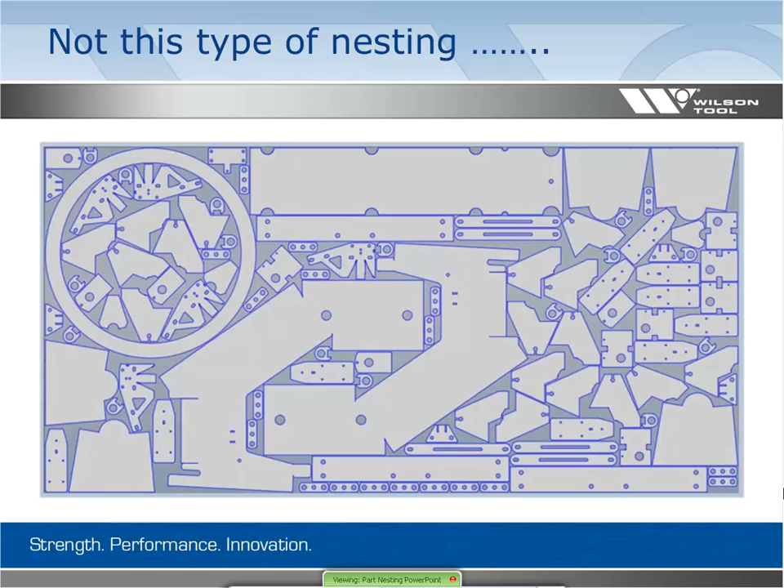Again, finding the right fit, perfecting your nesting processes. I also want to acknowledge Glenn Sheldis' work putting all this material together. Right now, we're not going to talk about nesting as you see it on the screen right now, the very complicated stuff, but rather the same piece individually nested, so it's relatively simple.

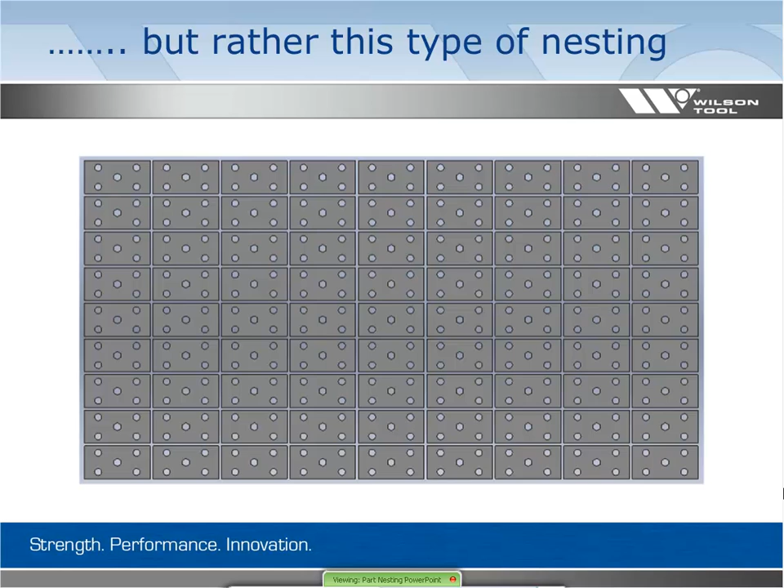So to break it down, we're going to talk about parts falling out, generally due to weak joints, sheet shake, and our solutions are going to be tabbing. We have a variety of options there, and then also when and where to use those tabs. Another nesting issue is pinch points, and those are going to be resolved with some tooling solutions. And then part of nesting is nibbling, so you get that uneven wear or reduced tool life that often results in galling as well.

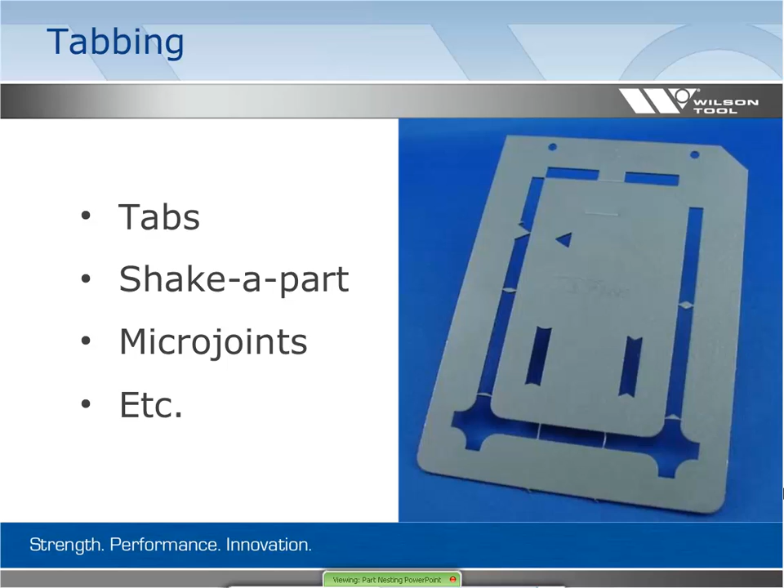Shapes, i.e. piercing tools, then we're going to introduce some lancing or forming tools as part of the solution.

A wire tab, as you see, is very popular, or historically was very popular. It's unstable and does not break cleanly. The tab width is roughly 33% of the material thickness. One would say it's dangerous and should be used as a last resort.

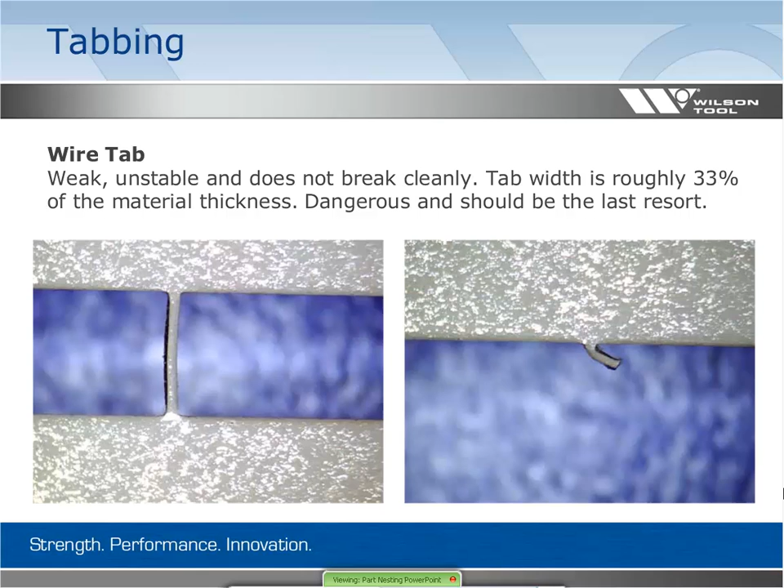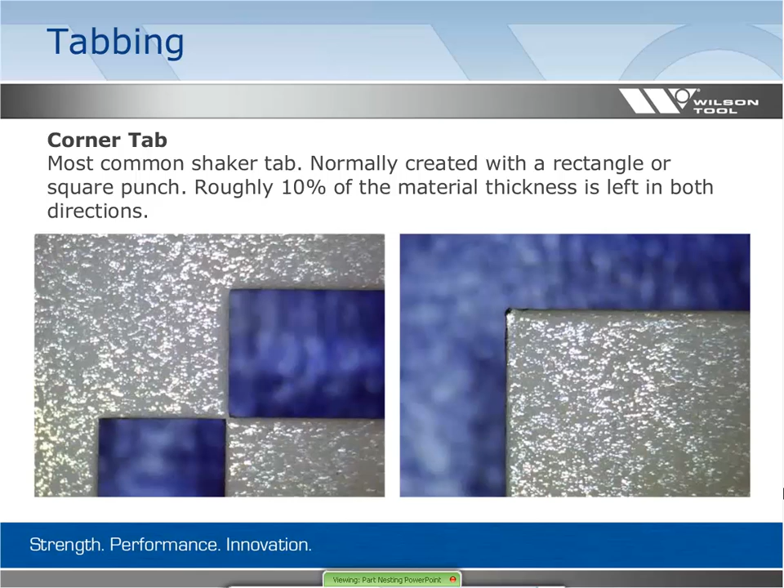Corner tabbing, the most common shaker tab, normally created with a rectangle or square punch. Roughly 10% of the material thickness is left in both directions. On the left side, you see the part still inserted in the sheet, and the right photograph, throughout these, shows how it broke away. That's how we determine that 10%, or how it's defined.

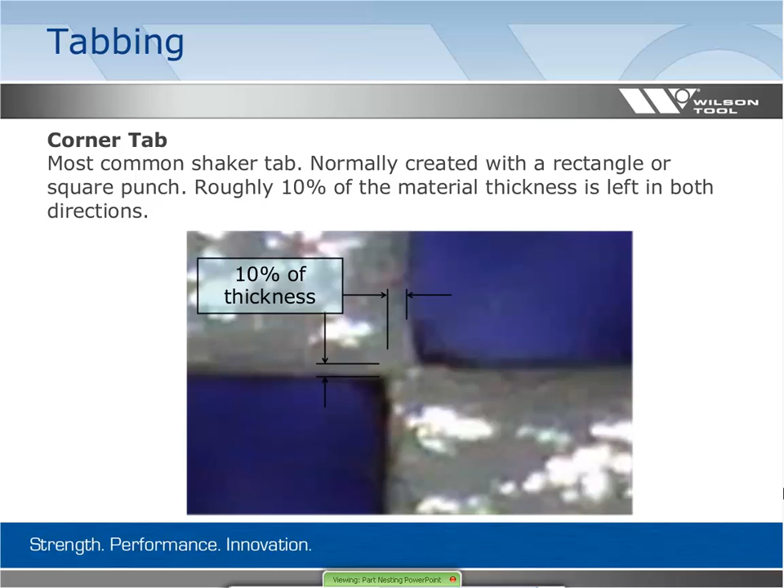Another 2D shape would be an equilateral triangle. It's a standard shaped tool, relatively inexpensive. So we're using a triangular tab that breaks cleanly. The tab width is again roughly 33% of the material thickness. And you can see as it's broken away, there's that little pip that we've created.

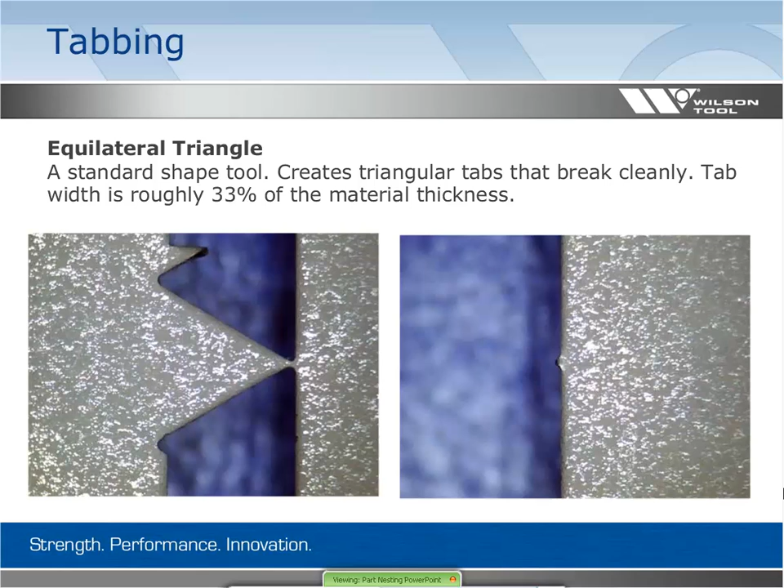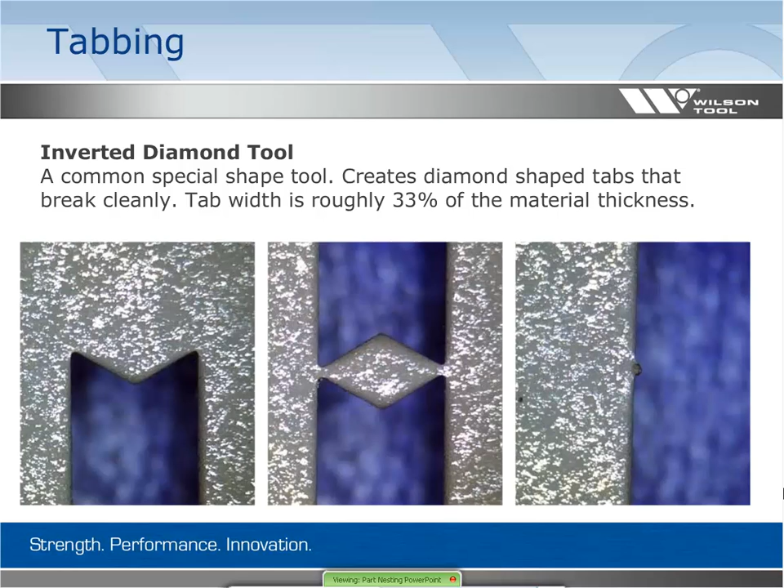A variation of that inverted diamond tool with horns. It's a special shape similar to that inverted diamond. It creates a diamond-shaped tab that breaks slightly below the edge. The tab width is again 33% of the material. The big difference, I'll highlight a couple things: an inverted diamond doesn't have to have just a sharp point. As you can see, this one's got a nice curved arc. But the big difference is we've got this little horn, so it's digging deeper into the sheet. So when it breaks away, when you look at that sheet, nothing really sticks outside from the edge.

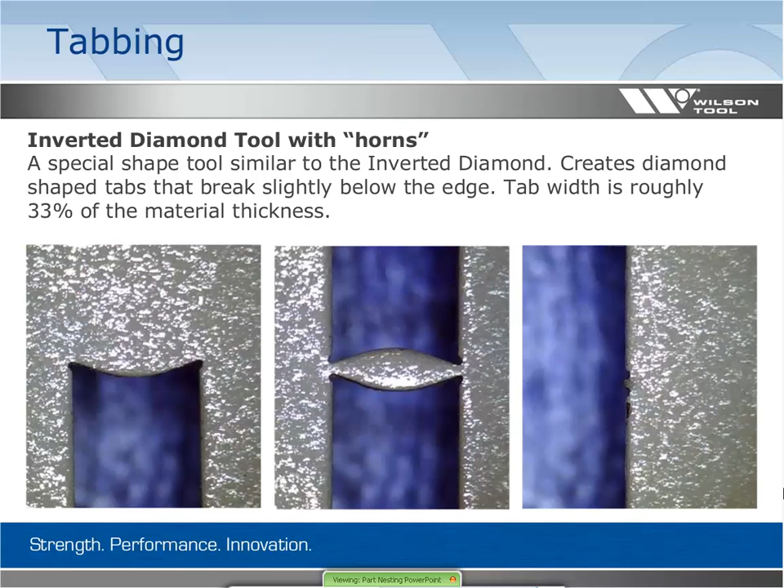This is where we get into forming tools. So rather than just a 2D shape, we're going to put a little form up, form down coin on the edge of a tab, normally used on, say, a chamfer corner. So what I'm trying to do is literally put a little V groove, which can be top, can be bottom, can be both, and that's going to create a weak point where we're going to break it away.

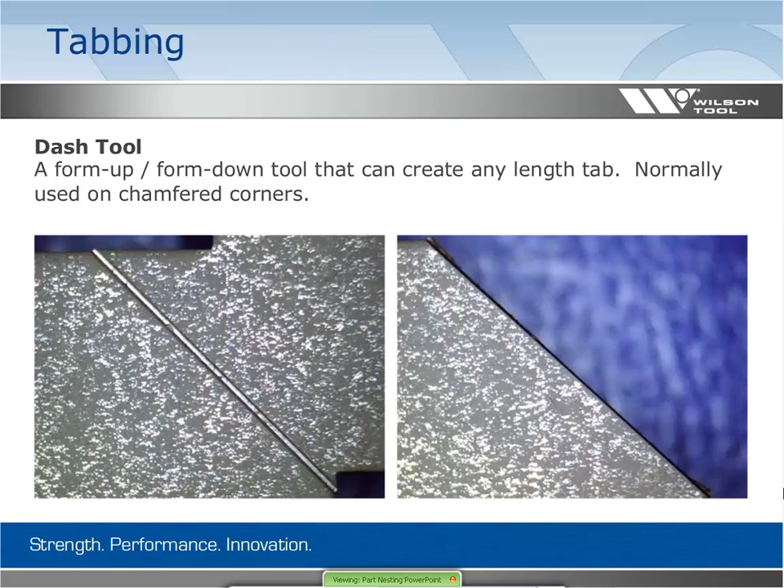Another variation of a forming tool goes by a lot of names. Here we're calling it a half shear tool. It might just be a single-sided lance. I'll show you a couple different ways of doing this, but the forming tool...

Okay, so you can turn that on. Rumor has it we had some audio issues, so I'm moving my location. Sorry about that issue. Actually, I'm going to make sure I clear that by hanging up. Okay, that's gone.

So on these lance and forms and in the coining tools, the big thing that we're really chasing is creating a much longer area of connectivity on our part. That gives us a lot of stability.

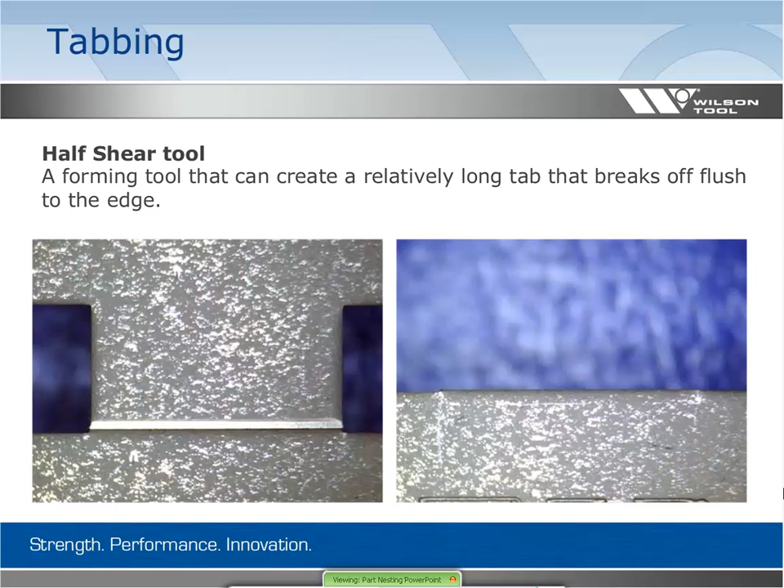Now, with these lance and forms or chisel points, it changes the visual a little bit. So you can see I kind of have two little points of where it broke away, as opposed to just one. But it's a smaller indentation, if you will, so it's generally a cleaner look.

On that single-sided lance, here's a profile where you can actually see how the material is moved from being at the sheet level. It's lanced down or lanced up depending on your direction. You can also see how the opening changed. You got those little pips there.

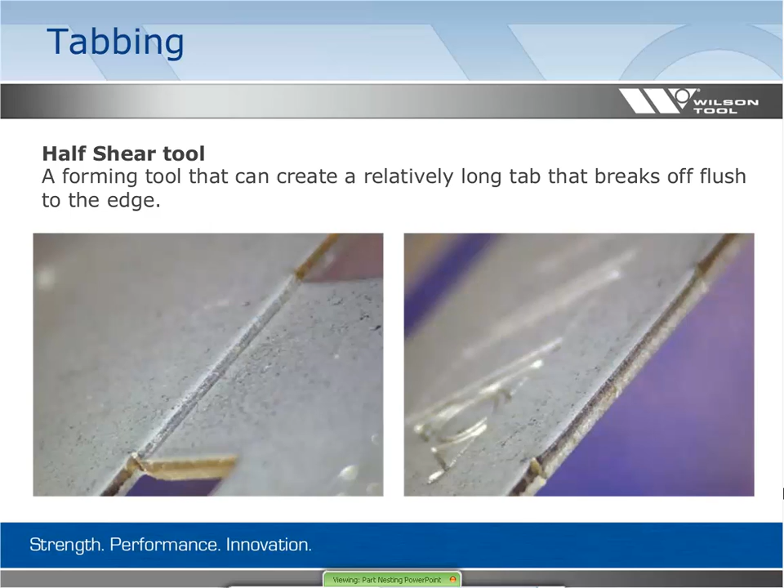This is a sample that Wilson Tool makes and shows with customers, so you can see the difference with this new lance and form design, because it's becoming more and more popular. As you can see, the tab is kind of then gang bent in a press brake.

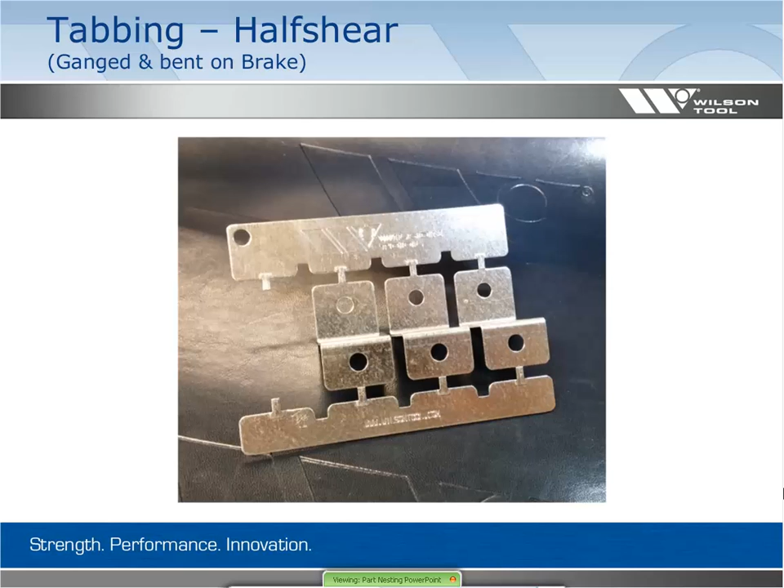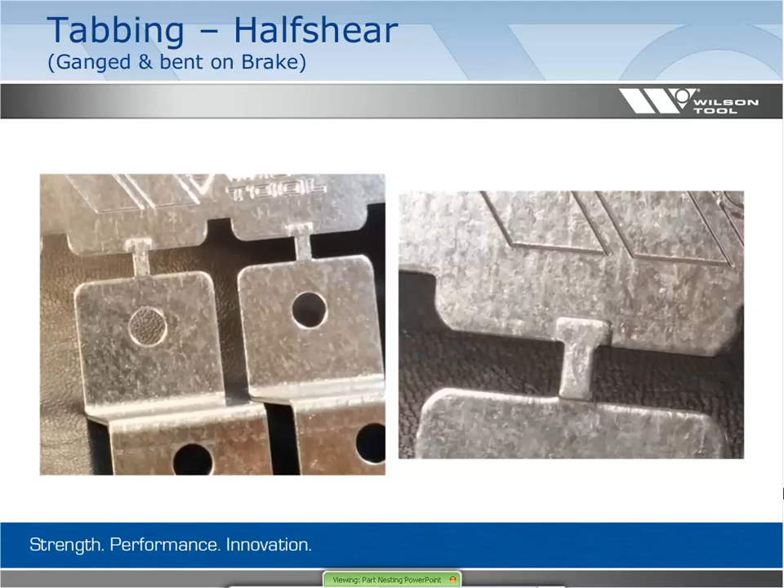Give you a little bit more close up. So in this case, if you imagine, this tool would have been a true four-sided cutting half shear that was run, and then afterwards brought the cutting tool up, trimmed it up into that shape. So it's very stable, very useful, and it allows you to do more and more with your fabrication methods.

So from a programming method, if you didn't have those lance and forms, you can still use your current tools, your current processes. If you tweak that program, we're going to not make that part as small immediately during the process. So I'm going to advance my slide, something popped.

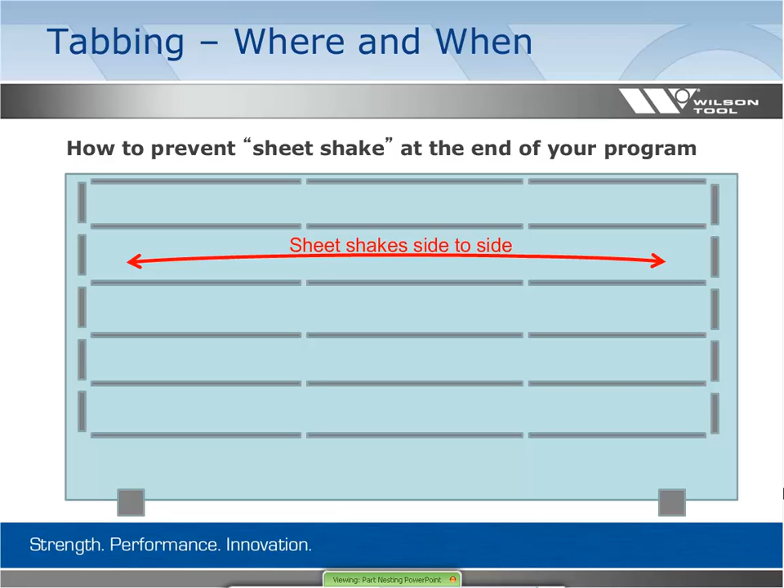So in this slide you can see how we have more web. We left web in a certain area, so as the machine is running, shifting back and forth, it's much more stable. After we get most of the sheet punched out, we're going to come back and then remove more material. At this point, we're going to play a video of this type of operation in process, and you'll see how stable the sheet is while we're punching it.

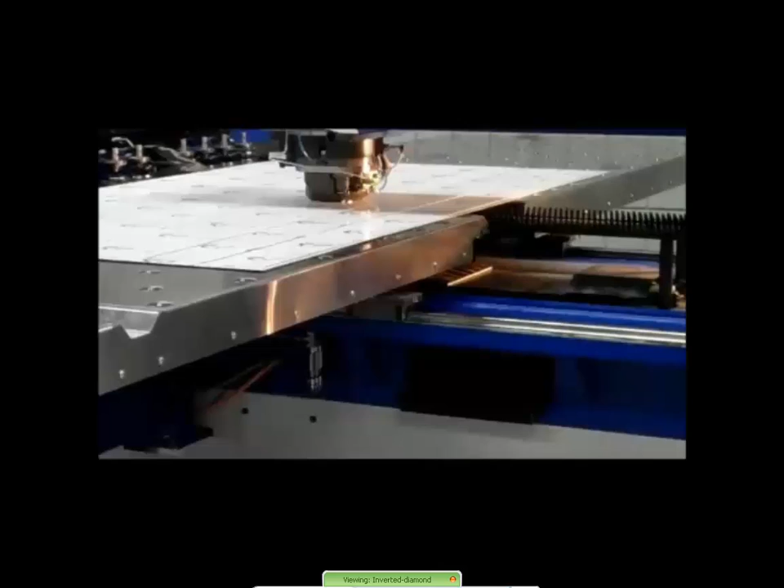Hopefully it went full screen. I tried to make it full screen, or you might want to make it full screen on your own computer.

You'll see a much larger web as it's moving left and right. Nothing falling apart. This part was utilizing corner tabs and then those other tabs that are currently wide, and we're going to narrow them up with this in and out nibbling mode.

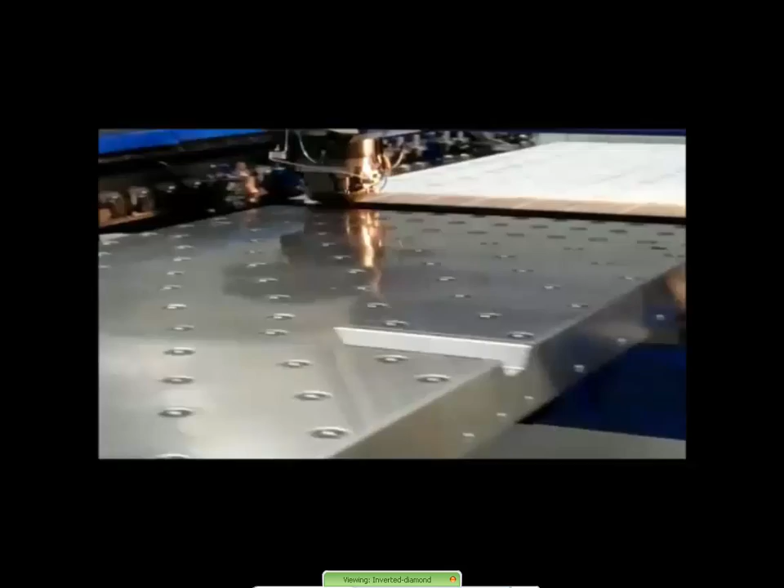Okay, just going to clear my notes here.

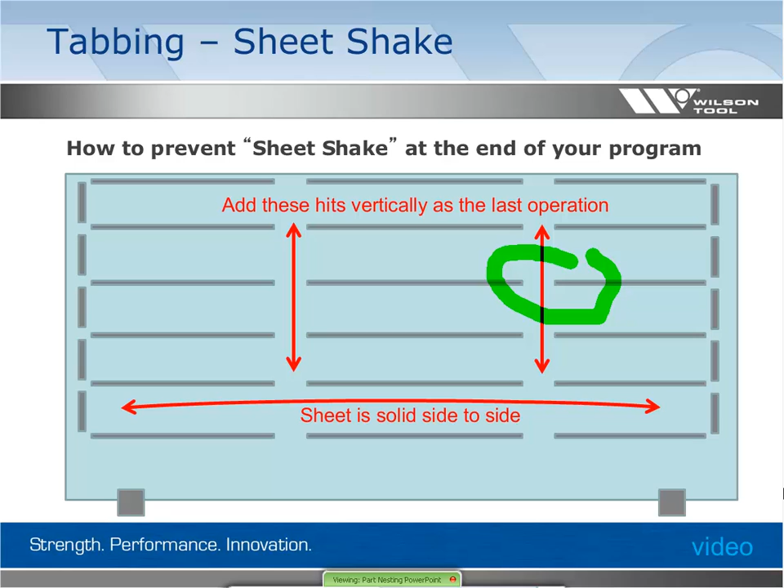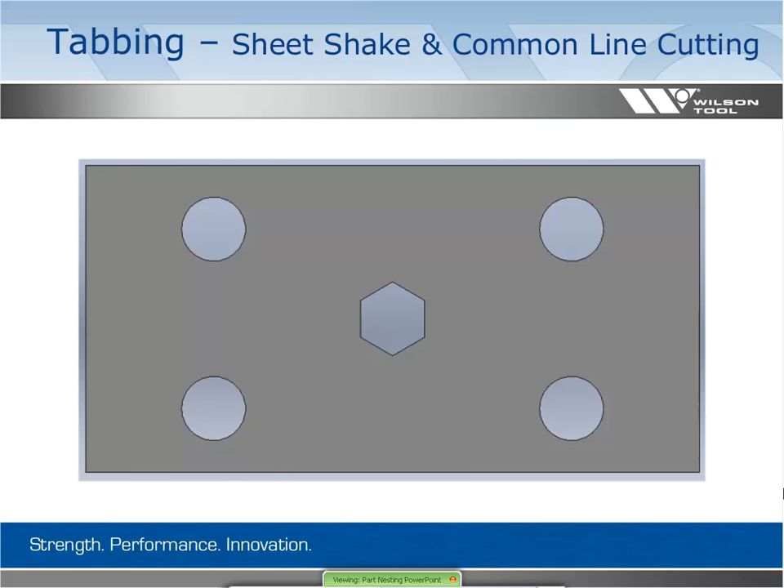Another method of avoiding sheet shake is to nest the parts a bit differently. So if this is our part, and we were going to put it in the nest, here's your inevitable or more common practice. Inevitably, it's going to start shaking apart. What we do is we create mini nests, if you will, so you have those nice, thick webs adding stability to the sheet. So we got 9 little islands there, much more stable to go with.

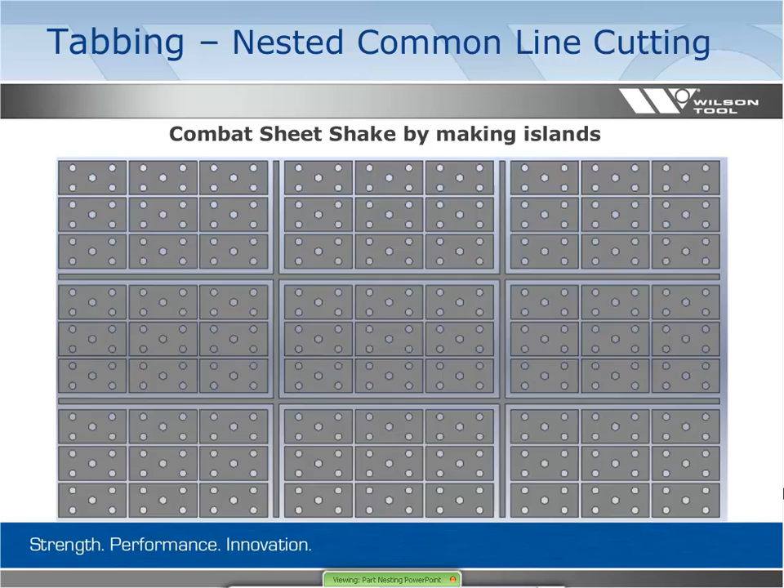So our summary of tabs that we've covered would be the wire tabs. Some would say dangerous and should be outlawed. Many people have cut themselves on them. Corner tabs, for those, your part has to have a sharp corner to use those. Good sheet stability depending on the tab location.

The diamond tabs, they may break at the wrong side, poor sheet stability. The triangle tabs, that requires an auto index station. I probably should have noted that earlier. Better stability than the diamond tabs.

The dash tool has a different edge look and feel. Some might like it, some might not. It's often used on the chamfered corners of a part. The half shear tab: the sheet is formed, which can cause problem issues or programming issues, but it has good stability and can cure sheet shake as a problem.

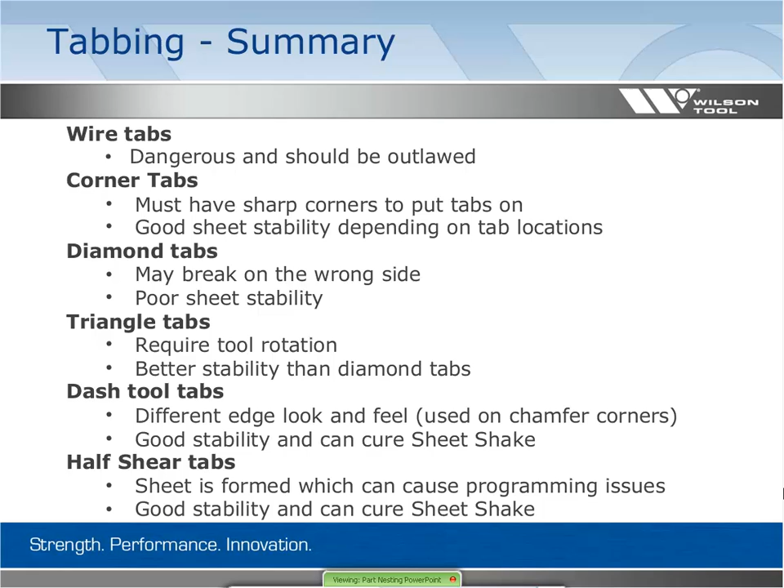I said I'd go back to this Wilson sample. The point of the sample is, when we're doing this live, we have the half shear tab where the arrow is, that's where it's being effective, but inside the sheet you'll just see how it would normally hit when it wasn't used in a tabbing situation. Then your triangle, inside you see it's just a triangle tool, and when you use it next to each other you're creating a tab. So that's what we're trying to show you here.

That internal part can break away, and if you broke it away, on the outside of that sample you could run your finger across it and get the effect of these different tabs.

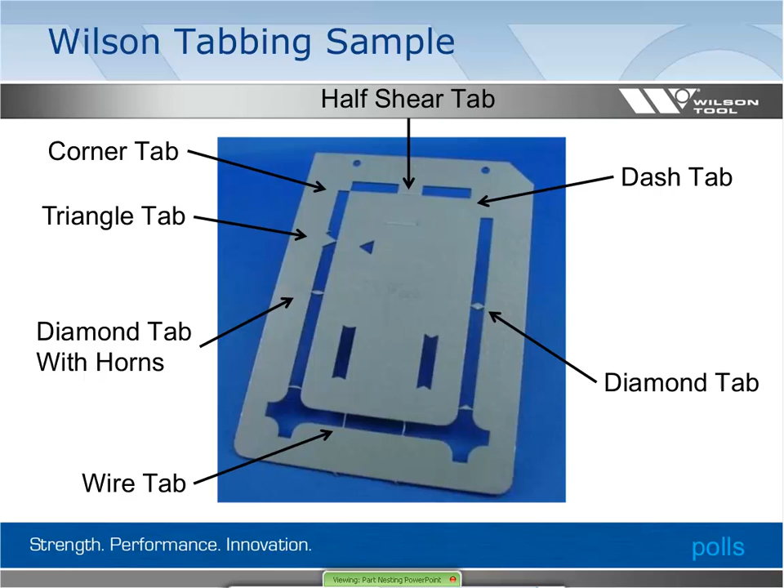The next topic relates to nesting and slitting. We get those pinch points, those ugly bumps along a slit edge.

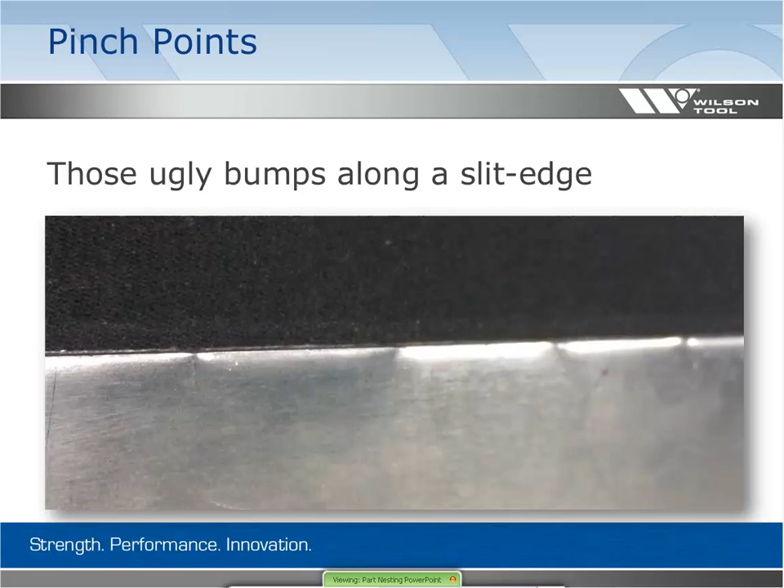Our solutions are twofold. We can do it with 2D shapes, and we can do it with wheel tools. Good ways of avoiding those little pinch points. They're most commonly caused by slitting or nibbling. Hopefully you can see the pinch points. I mean, it is a common complaint for customers, at least to me it is.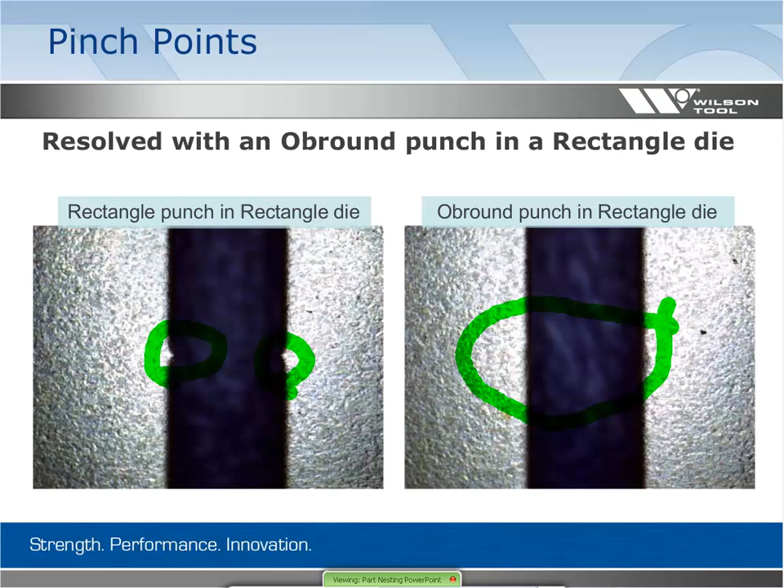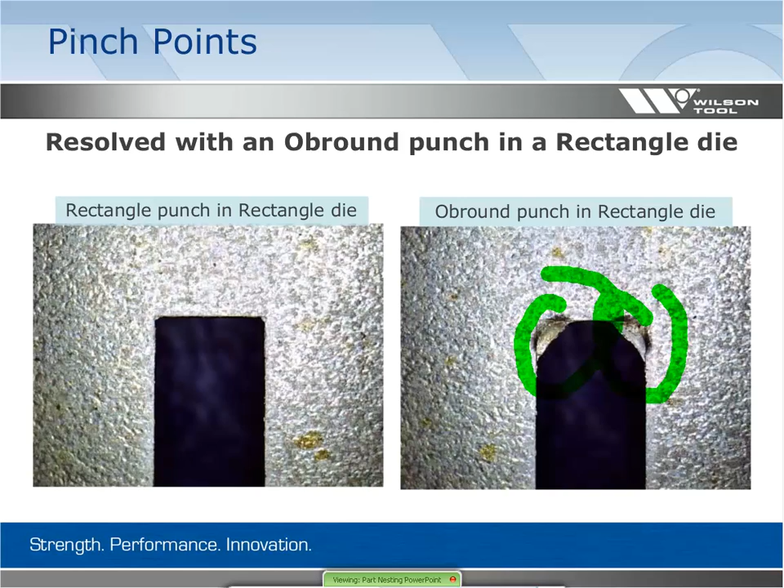Recently I've spoken to some customers who thought they could go with just an obround and that would cure it. It really requires that different shape. I'm going to go back one slide and show you, it requires that effect to get rid of the pinch point. So something to consider.

Another wheel would be a rolling pincher. I failed to give you a slide on what the rolling pincher does, but I'll draw it: the wheel has little peaks, it can be top side, bottom side, or both. But the point is we're pinching, we're coining that material. So before we go slit, we're going to run that wheel up the side that we want clean. Sometimes you're doing common line cutting, so you need to do both sides.

The image on the top shows you if I don't run a rolling pincher, the one on the bottom shows you when I do run the rolling pincher. It's very clear, I've done this for a variety of customers. Some accuse me of just zooming in on the photo to hide the pinch point, but the samples prove themselves. It's also effective to pre-mask burrs on the bottom side, so it's a 2-for-1, getting rid of pinch points on the top side and hiding that burr on the bottom because it never gets to the bottom of the sheet.

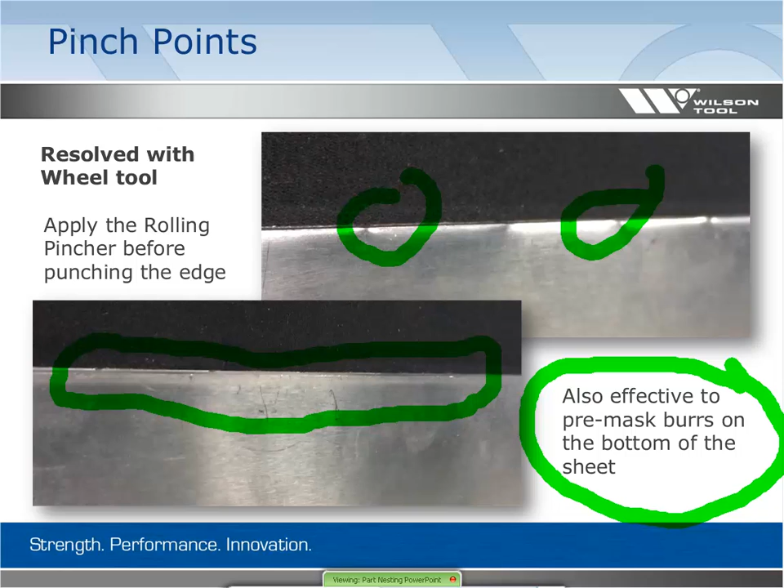Here's just a sample that we like to share with customers, to give them an idea how we're doing the pinch points using a pincher or a dash tool, and we can even gang them up. So here's 9 parts, actually there's 4 subparts in there that we gang together.

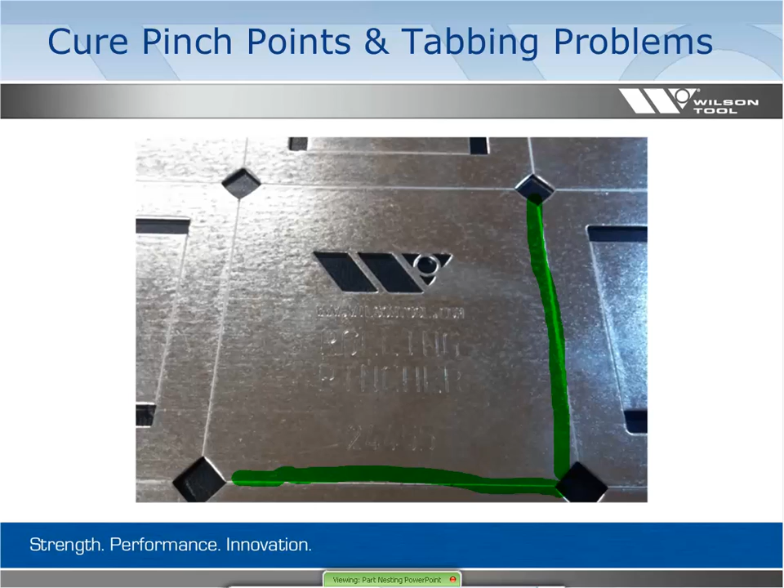They're held together just with that coined edge, that rolling pincher. So a little bit closer setup, we're running those roller pinchers around here, and then as I took the sheet out of the machine, I can snap those apart and they'll break away.

So those cures for the pinch points, we got that obround punch and a rectangle die. But here I'm also noting a long D punch and a rectangle die. The reason for that is because there's those times when you still need to create a corner tab.

So I'm creating that corner tab. I can use an obround and an auto index station, bring my two corners together and still have it tabbed together.

And then the rolling tools, we got the rolling shear, a rolling pincher. Again, it can be just top side to get rid of the pinch point, but if you do a top and a bottom, you can often hide any burring that may or may not occur.

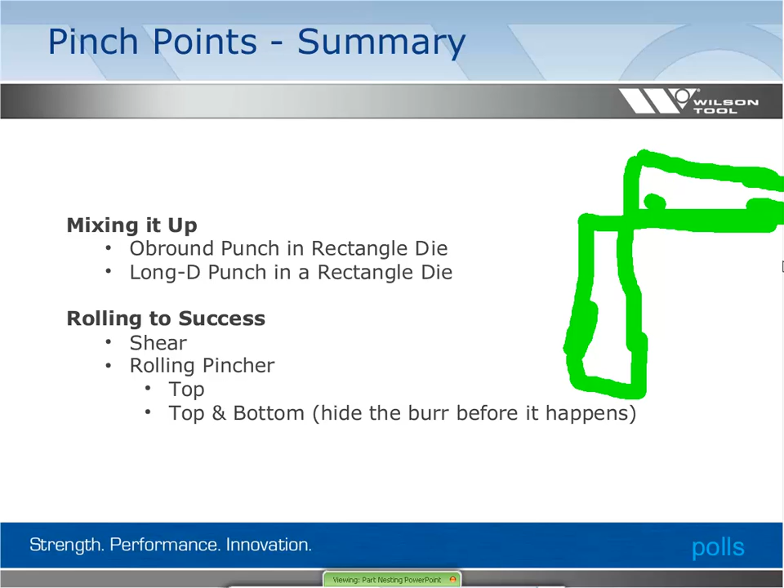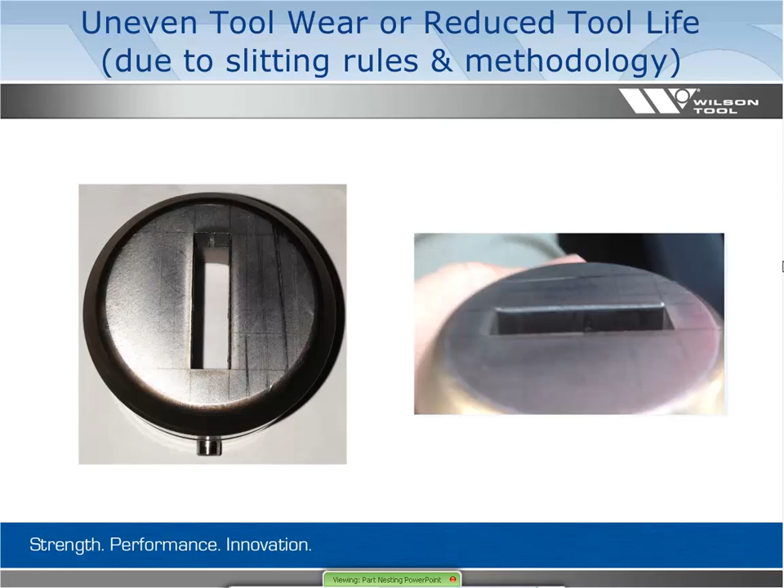Lastly, in the nesting solution, a lot of times you're segregating parts, you are doing a lot of slitting, uneven tool wear, you can get that reduced tool life, rolled over edges, turns into galling, it gets pretty ugly. The die I'm showing you, you can see the marking, an actual die, and you might pick up on the oddity, it looks like the customer's using it slitting in both directions.

That can be a problem. So slitting tools, there is an intended direction, we're going the lengthwise. If you go the other direction, you're hitting often so little material, the slug twists, kicks the punch to the side. Now you got punch and die contact, and you break your tool down very fast.

So here's another poll that we want to have, mainly out of curiosity: do you slit your rectangles in both directions? Yes or no?

Oh, did I skip a poll? Apologize. The poll that's up, if you guys wouldn't mind answering it: which methods of dealing with pinch points do you have? I blew by this one - obround punch and rectangle die, long D. And then the second question is, of the methods you don't use today, which methods for dealing with them would you like to use? So if you guys wouldn't mind answering the poll from a few slides ago, I'd appreciate it.

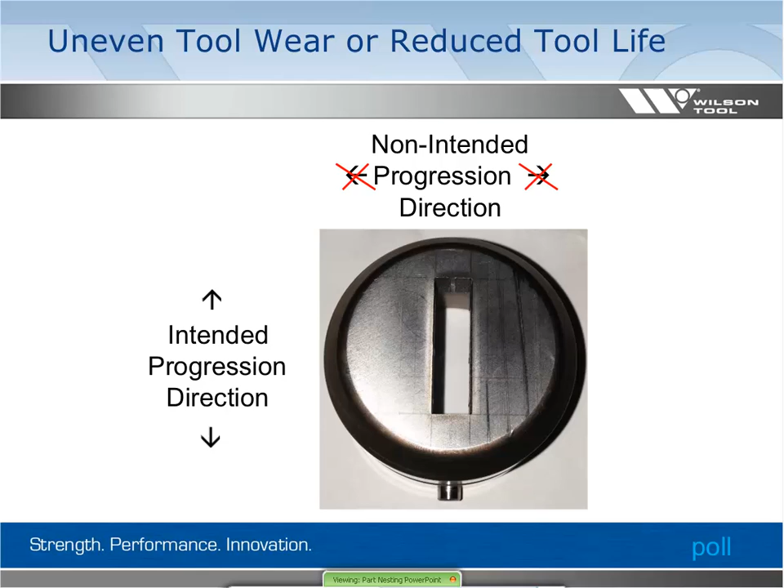Okay, here's our results. Again, there's a fair amount of people who aren't using this method. A surprising number are using the obround punch and a rectangle die, some using a long D, rolling pinchers. And then for those who don't, what you'd like to use in the future, that obround punch and rectangle die really grew up near 60%.

So we'll just move on. Sorry about the delay on that poll.

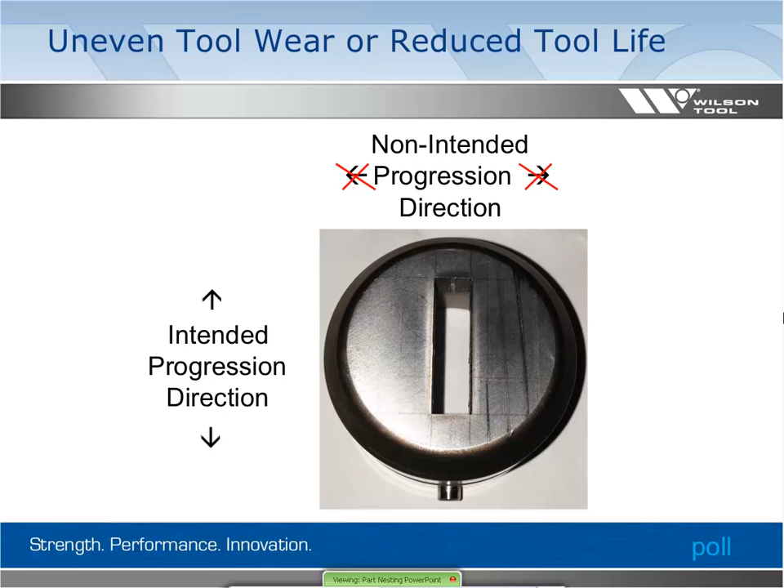So I want to show you here's the intended direction of the slitting tool, and then kind of that recommended overlap. So we'd like to see a minimum amount of corner rad, because often these rectangles have radiuses in the corner, make them stronger. So it's really corner rad with about a half material thickness. Now the maximum, we don't want to take so little material it becomes problematic, again side loading. So we'd like to be about that quarter of the tool length, no more than half.

I know a lot of people do a lot worse conditions, and I'd just like to make a point: you can save yourselves a lot of tool if you pay attention to how you're stepping over on your slitting.

The non-intended progression direction—I'm showing it because I recognize people are doing it. We suggest you don't, but if you still do it, you really should use a large minimum step over, which is pretty much the width of your punch minus that corner radius, minus half material thickness.

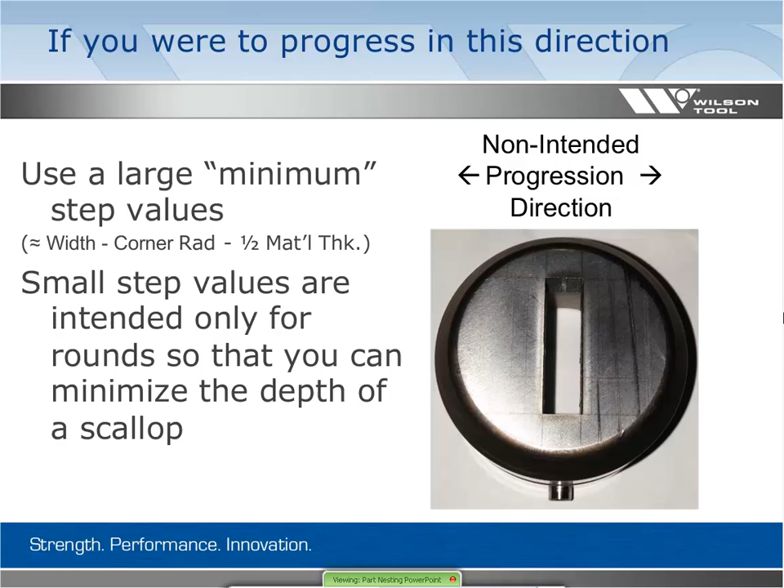We really don't want you to do it, but since you're doing it, I want to give you better suggestions. Small step values in your software have a max and min that are really designed for a round tool doing a contour to minimize scallop depth. That's what I'm showing here—it minimizes that scallop. It's not really appropriate to use that philosophy on a shape tool, really just rounds.

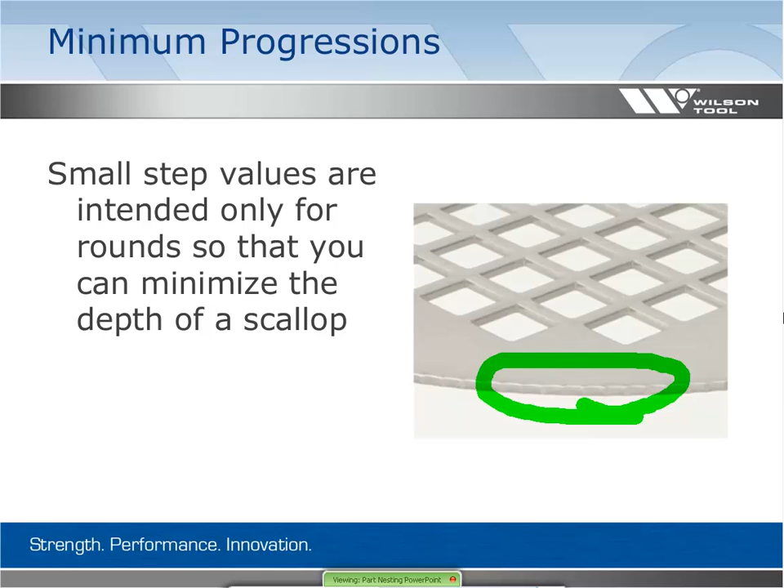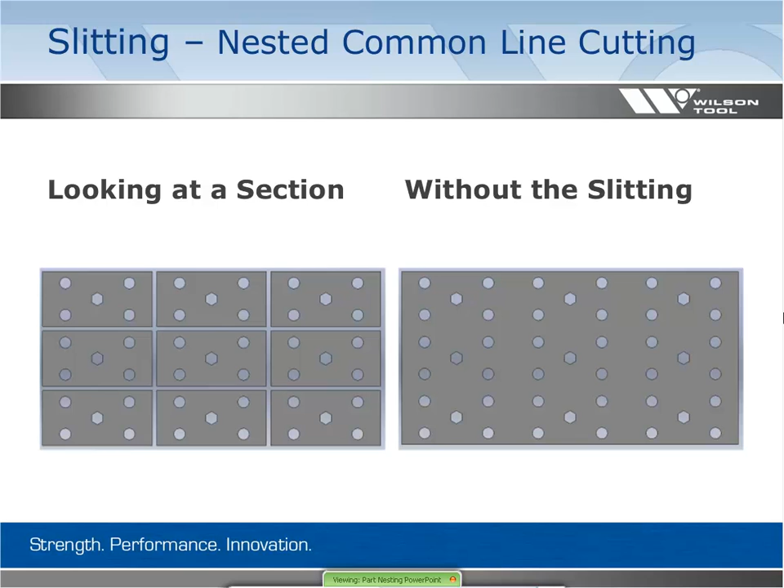Another way of addressing side loading is via the programming. So we're taking away our slits from that larger nest—we took a 3 by 3 as opposed to the 12 by 12 or 16 by 16. We're going to remove the slits, look at that sheet, and see how we can change our programming methodology to enhance our tool life.

On the top side, you've got the traditional slitting, which produces an unbalanced load. As shown, the rectangle in the right direction is the best we could ask for, but it's still cutting 3 sides—you're going to zip right through it.

On the bottom, we're showing an odd-even slitting. This produces a balanced load by leaving those big tabs. For the most part, I've taken full chunks, then come back and knock those out in a backwards pass, cleaning it up, giving an equal load side to side.

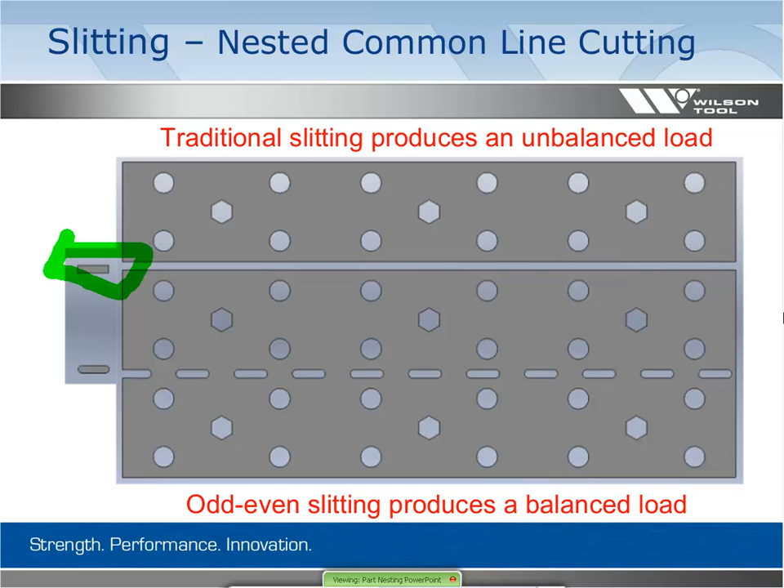Again, that traditional method is going to give you pinch points. On the bottom, I did the obround punch with a rectangle die, which will eliminate some pinch points.

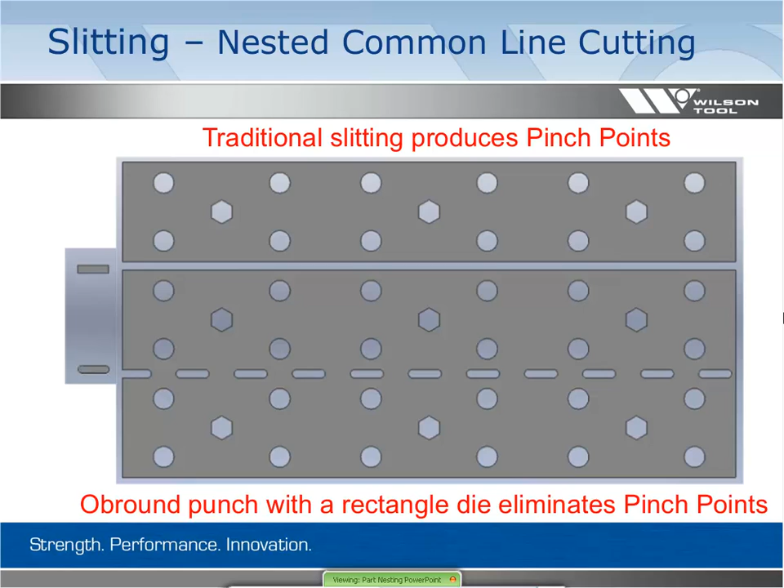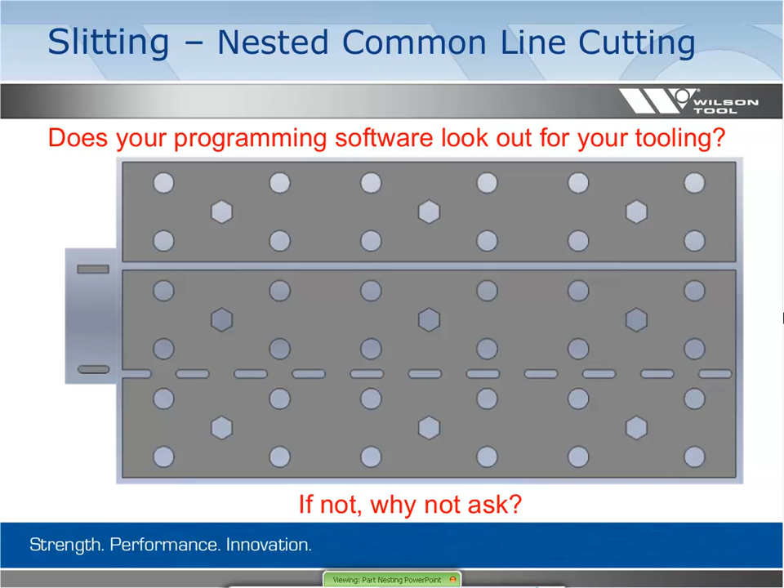So then the question is, does your programming software look out for your tooling? Everyone's trying to produce a part as fast as possible, but often at the expense of their tooling. It's my belief that some offline softwares are recognizing this, doing every other and step back, giving you a little better tool life. So if you want to chase that, is your vendor going to support you in that decision? If not, why not?

So a summary on the slitting: take the step in the right direction to improve your tool life—don't go with that narrow step. And don't follow the crowd, maybe take an odd approach. You should see better tool life.

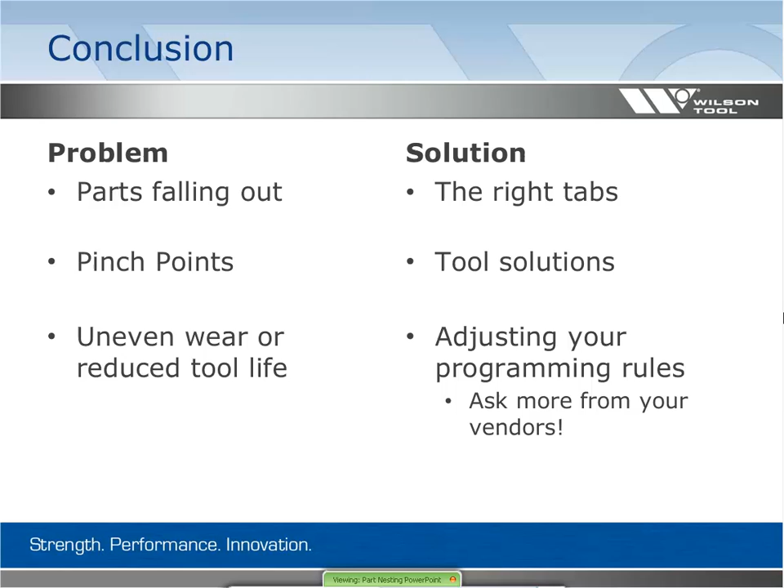In conclusion, we covered parts falling out by a variety of tabs—selecting the right tab, new designs are out, use them. Pinch points, we had a couple different tool solutions. And then uneven wear or reduced tool life—so adjusting your programming rules, and don't be afraid to ask your vendors to do something differently that you think will save tool life. We're all here to help you.

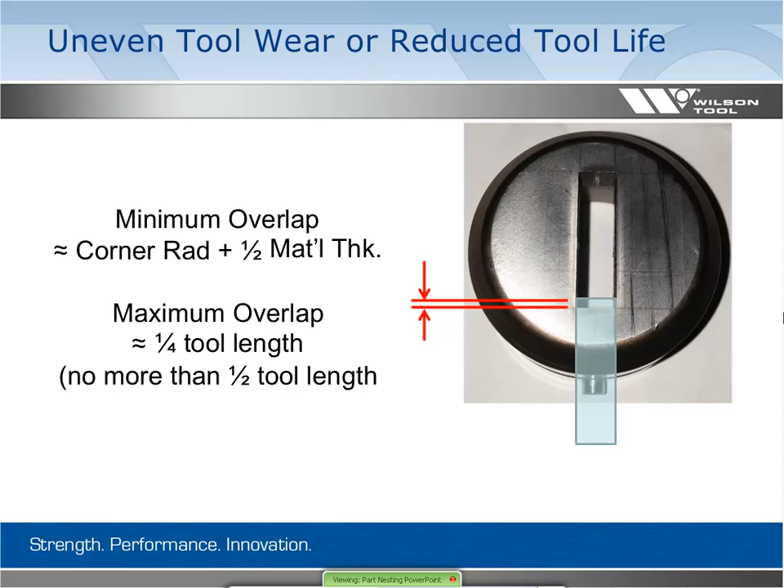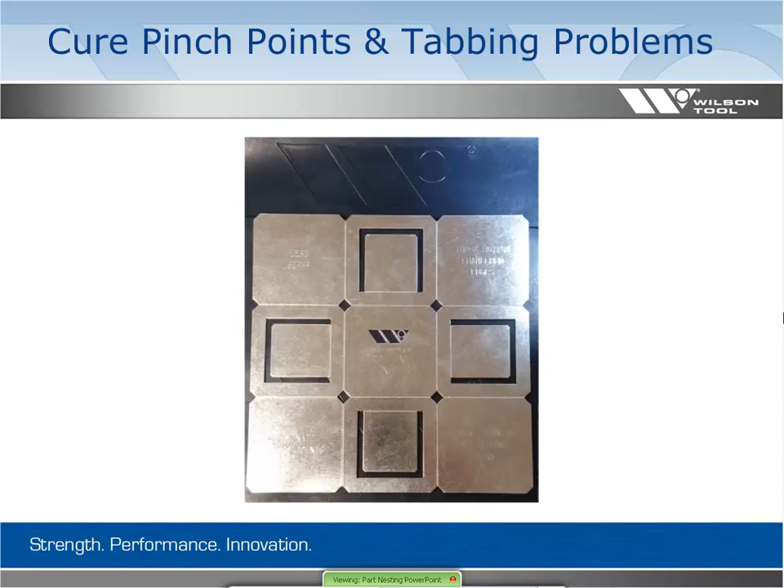Can you flip back to that? Slide back to that sample. Hop back to that sample. There it is—a little too fast. See, that's also, we've got two entrants—this one and also the slitting one. Everybody can hear you.